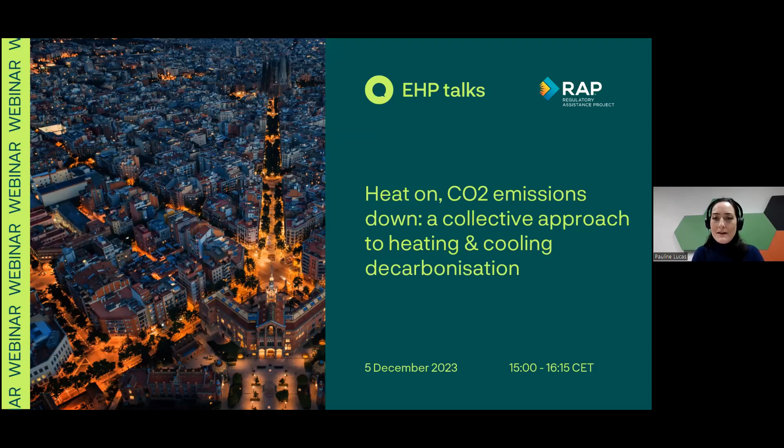For this, I am joined by two other speakers today, Sam and Madis. Sam Oxenor is associate at RAP, the Regulatory Assistance Project, and Madis Laaniste is joining us from the European Commission, DG ENER. We will have three presentations. First, Madis will tell us more about the measures in the Fit for 55 package and how the Commission is going to work on implementation of these measures together with the Member States. Then Sam and I will cover key findings and recommendations from three recently presented documents, covering policy principles and recommendations that can significantly accelerate the trajectory towards decarbonization of heating and cooling.

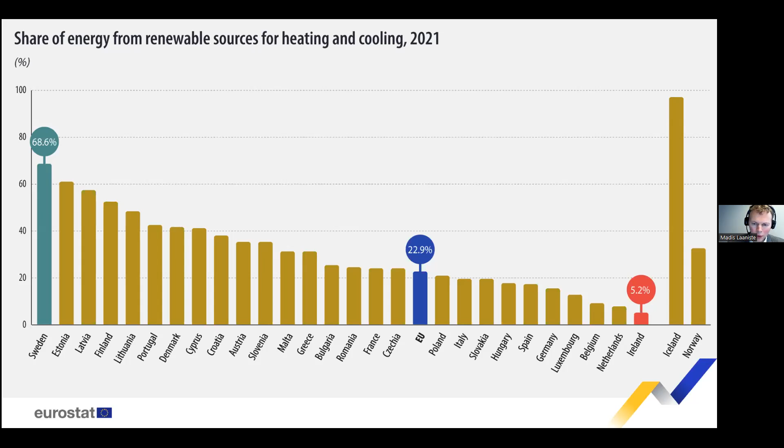With today's presentation, I'm trying to summarize what's been agreed within the Fit for 55 package, and particularly the Energy Efficiency Directive. First of all, what's the biggest achievement, in my opinion, is the new definition of efficient district heating and cooling, putting in place a clear pathway towards 2050.

There are also other important provisions, like putting additional requirements for district heating systems where new units are added or substantially refurbished. In addition, there will be a requirement for planning in all district heating systems to convert into efficient district heating and cooling systems.

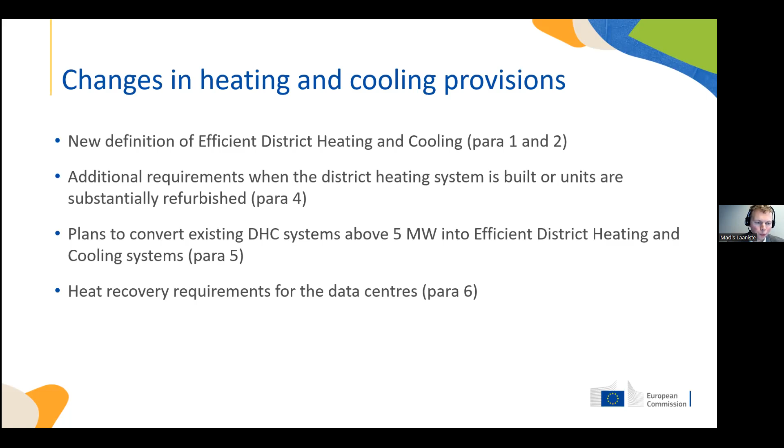A new element is more focused on data centers, and this is complemented with other provisions on cost-benefit analysis, where we are looking at a broader set of installations within the cost-benefit analysis, instead of focusing only on power stations and boiler houses. We are going to search for opportunities to use heat from service facilities, and use waste heat from data centers. So there will be more broad assessments made on this segment, looking at what might provide waste heat to the district heating networks and be a source for more efficient energy supply in district heating and cooling.

And the provisions in the Energy Efficiency Directive are complemented with provisions in the Renewable Energy Directive, and these will bring in the obligation to provide third party access in some cases. Also, there are requirements on the integration of planning for district heating and other energy networks.

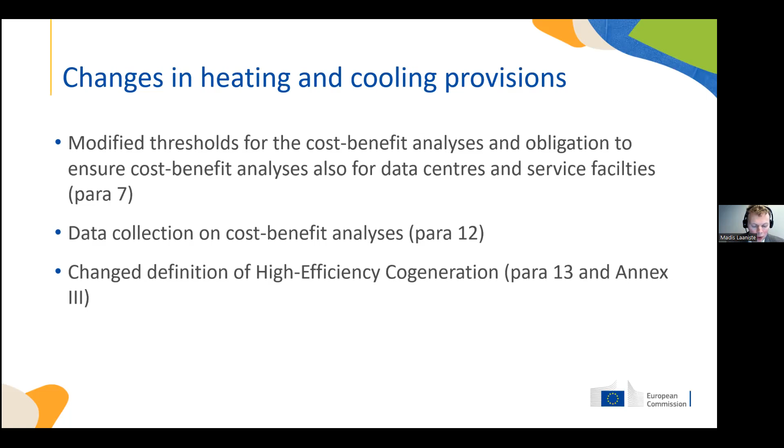So regarding details in the Energy Efficiency Directive, what has been recently agreed about the potential change in the district heating and cooling? With the new directive, we are going to change the definition of efficient district heating and cooling, and there are a lot of numbers and different shares that have been put in place in the directive. But the most important consequence of these new provisions is that as of 2028, only high efficiency cogeneration can be counted when we are trying to achieve the level of efficient district heating and cooling. So at the moment, all cogeneration plants can be contributors to efficient district heating and cooling systems, but later on, only high efficiency cogeneration plants will be able to do that.

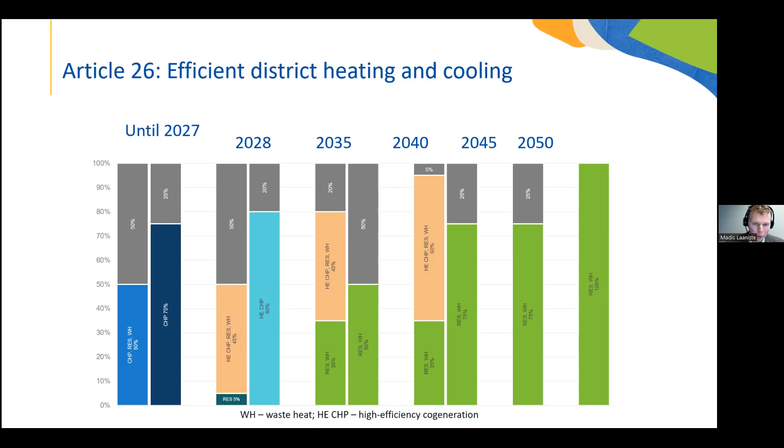In 2035, there will be a big change in terms of sources of energy in the efficient district heating and cooling systems. As of 2035, no systems will be qualified as efficient district heating systems if they purely rely on fossil fuels, and high efficiency cogeneration from fossil fuels doesn't help you achieve that standard. Later on, in 2045, cogeneration is not counted anymore, and in 2050, all system supply should come from renewables or waste heat. So these are four important messages from the definition of efficient district heating and cooling.

With the directive, we have also introduced a second option for showing compliance with the definition of efficient district heating and cooling: through the specific carbon emissions threshold. As you can see, there is a stepwise approach to decrease the maximum limit from district heating until 2050, so the limit will be gradually lowered through the next decades. Member states may use this option to define or qualify their district heating systems.

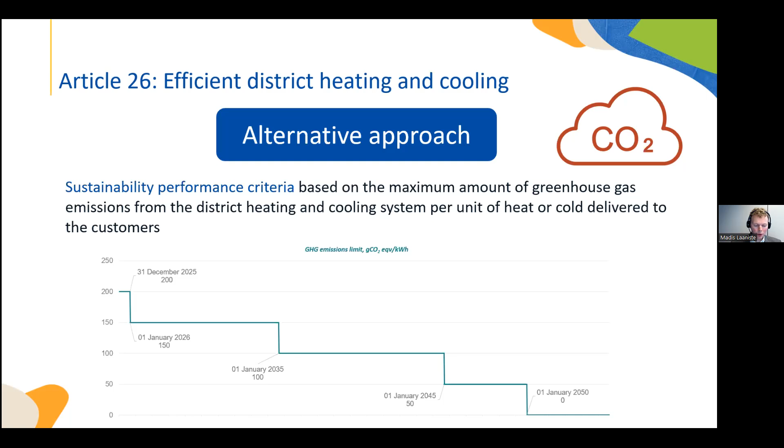Both ways of defining district heating and cooling might be used simultaneously. So member states might have systems that are fulfilling the carbon emissions limit, or meeting the definition that is mostly based on the renewable energy share.

What's also important in the directive regarding district heating and cooling systems is that there will be a new requirement to do heating and cooling conversion plans, and with these plans, every 5 years there should be an assessment of how to convert existing systems into efficient district heating and cooling systems. So what are the key elements of these plans? It's to find ways to improve energy performance in the systems, how to reduce distribution losses, and finally, how to increase the share of renewable energy in heating and cooling.

There is a requirement for these plans to be approved by the competent authority in the member state. So there is a big change for the large number of district heating systems across Europe regarding the legal obligations for those systems.

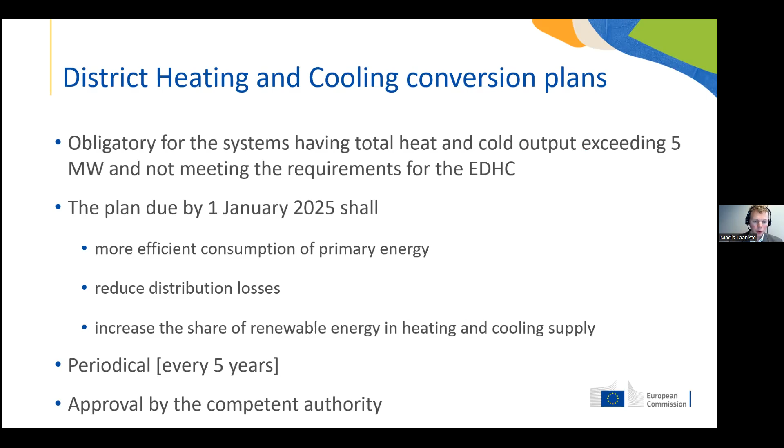What's also important is to remind that, in addition to specific requirements for district heating and cooling, we have general obligations applying to the whole heating and cooling market. There is still a requirement for member states to present comprehensive assessments on the heating and cooling sector, identifying the most resource and cost-efficient solutions for heating and cooling needs.

In addition to that, there is a new requirement that all large municipalities with a population over 45,000 should prepare local heating and cooling plans. These are particularly relevant for areas where district heating systems are in place or planned, and we see a good chance for collaboration between private and public authorities to set clear pathways towards future decarbonization of heating and cooling supply in those locations.

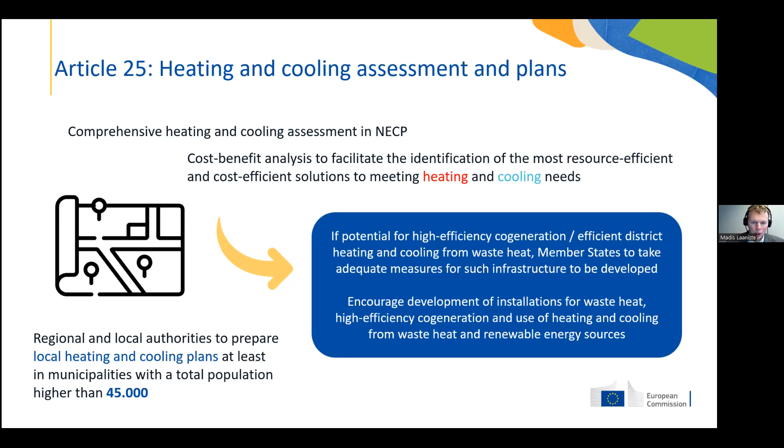So that was my quick summary of the situation in the heating and cooling sector after adoption of the Fit for 55 package, and what are the new obligations in the way ahead of us. Thank you for your attention.

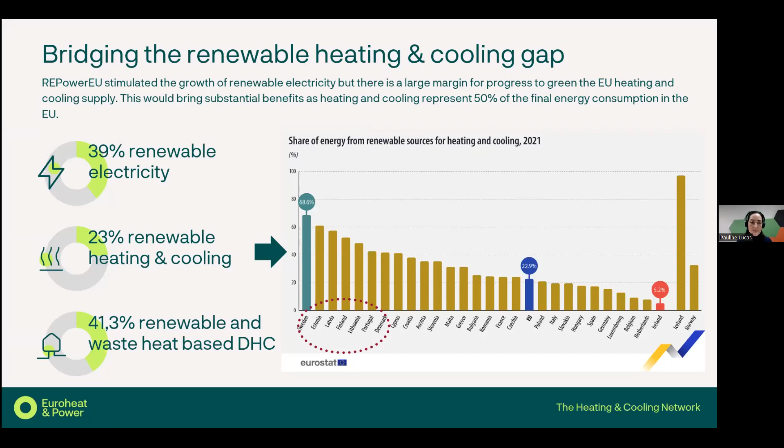First, a change in the production mix, so we will substitute some fossil fuels with renewable production. Second, it will also rely on an expansion of the market, so from the current 13% to 20% by 2030. And then the third reduction will go via the use of biomethane in district heating.

So maybe just as a clarification, this data has been modeled by Aalborg University and is from the study that we showed at the beginning, called Heat Matters, the missing link in RePowerEU.

Obviously district heating won't be the only way to reduce natural gas demand. There will be others also shown on this graph: energy efficiency in buildings, households equipped with heat pumps, renewable deployment, etc. This scenario is actually modeled to achieve 15% more savings than what is foreseen with Fit for 55 and RePowerEU, just by also modeling this type of synergy between sectors and the flexibility that can also be provided by district heating.

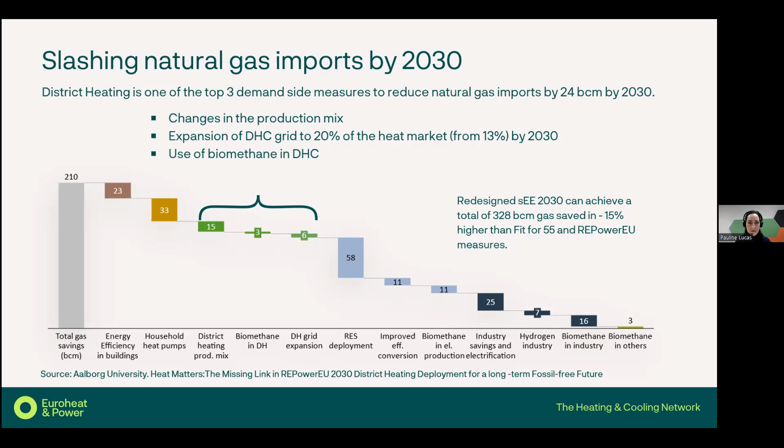If we look a little more into this changed mix - sorry, it's a little small - the key takeaways here are the significant increase of the use of geothermal and waste heat, so 29% for these two combined in 2030 and 49% in 2050. And as I just mentioned, district heating will also have an integrating role for fluctuating renewable energy, both by the use of thermal storage and flexible operation of CHP.

So here you see it's modeled on the left graph, to be used in the winter, and also, of course, with the use of this renewable electricity in large-scale heat pumps.

Of course, this change in mix needs to be combined with more efficient and smarter buildings, so renovation will be necessary. Both this combination of district heating and efficient buildings will enable several things.

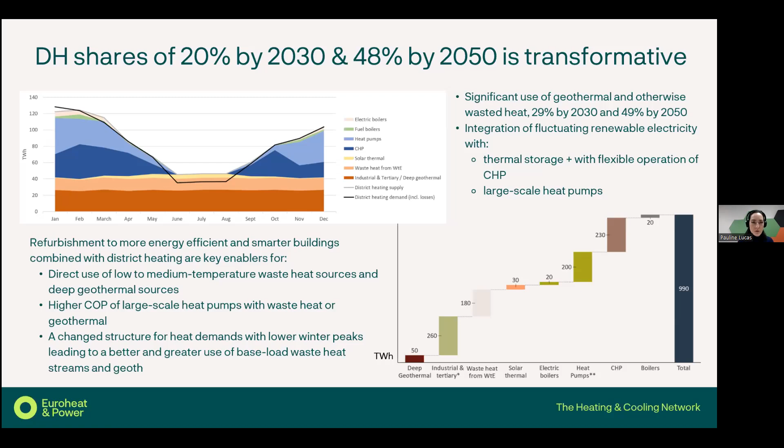The direct use of low to medium temperature waste heat sources and renewable sources such as deep geothermal, higher COP of large-scale heat pumps combined with waste heat or geothermal, and also shaving the winter peaks, changing the structure of heat demand. This is also what is represented here.

Continuing, but you may ask, where is this potential? The study also provides some insight into where the potential is, on which markets.

District heating will increase. Here we have countries that have very low shares now, below 6%, and also countries that already have average shares of between 10 and 20%. The study is anticipating growth in the district heating sector, between 10 to 15% by 2030 and 35 to 55% market share in the heat sector by 2050.

Also, countries where district heating is well developed still have some margin to grow, to cover the rest of fossil fuel installations and easily connect these additional customers.

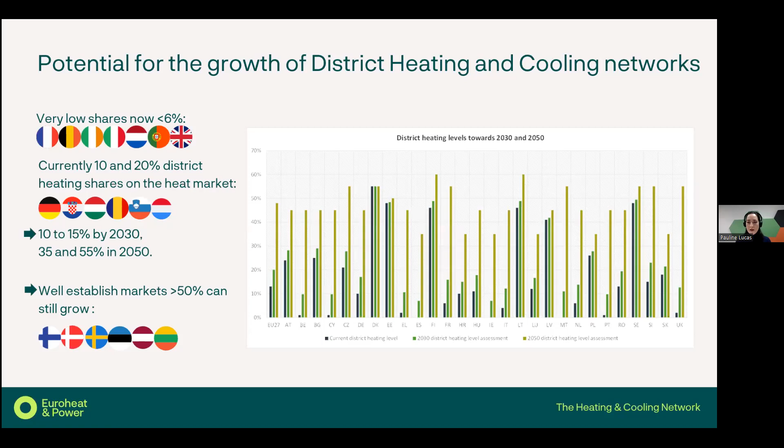We have seen a different representation here, and I will come in a moment to the recommendations. We know we have a strong legislative framework that will lead us to carbon neutrality in 2050, so I will not go over this again - Madis did that for us - but just to say that there are really some safeguards and milestones that will push the sector forward.

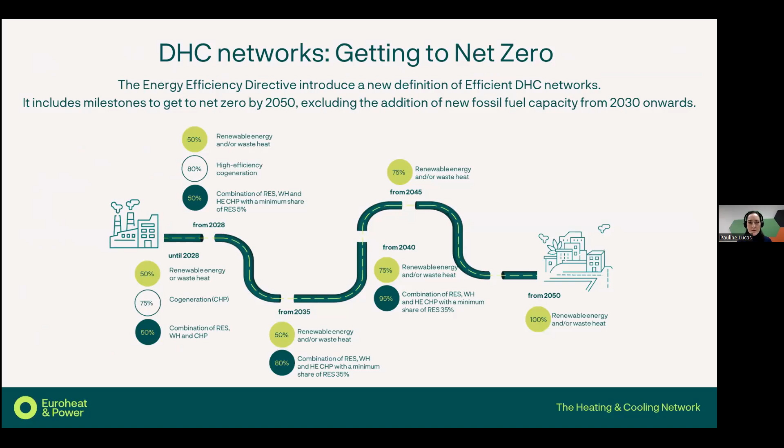But if we want a decarbonized district heating sector, we need these four pillars that we have identified. First, to make buildings DHC ready, or clean heat ready, let's say.

This will go through, for instance, the lowering of the flow temperature - Sam will tell us more about that - or the refurbishment, including hot water loops.

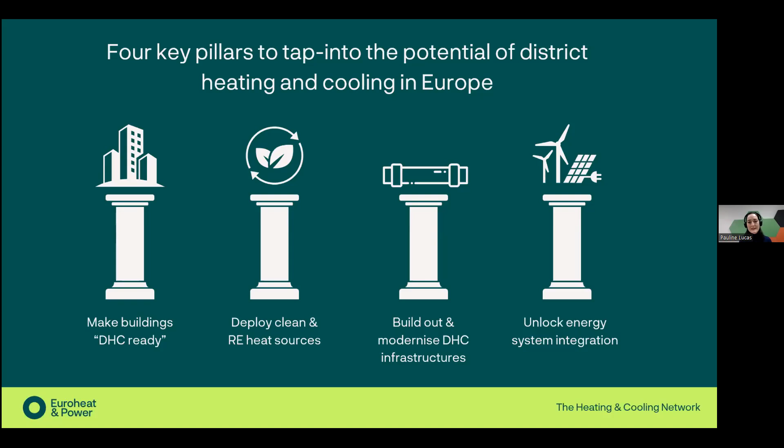Of course, as we already discussed, we need to deploy clean and renewable heat sources. We need to build out, expand, and also refurbish existing infrastructure. Last but not least, the component of flexibility - so unlocking energy system integration will be key.

So now I will go on to recommendations that are not from the Aalborg study, but actually from the blueprint launched by Euroheat and Power a couple of weeks ago. One of the key aspects, I will start with that, is this district approach to building renovation and also energy performance assessment.

Whenever we are renovating one or several buildings, we need to really consider this district approach and make an assessment at district level, considering what type of clean heat sources are available, be it waste heat or others. This goes hand in hand with the planning of heating and cooling.

As Madis mentioned, we now have an obligation for cities above 45,000 inhabitants to plan. These plans are not compulsory to implement.

So what we are suggesting instead is a zonal approach to clean heat subsidies. Wherever it has been identified that district heating was the best solution, support should be provided to connect to district heating. Wherever heat pumps have been identified as the best solution, subsidies for heat pumps should be provided - a very clear approach that enables the consumer to really make the right choice.

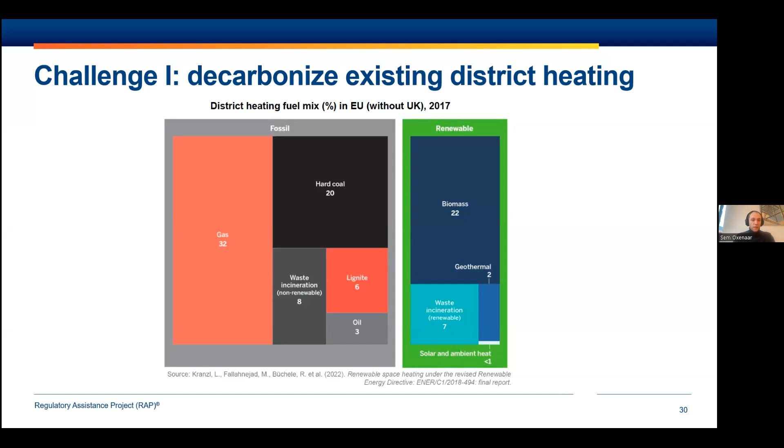Alright, let's get started. As Pauline has already extensively shown in her presentation, there's a huge potential for district heating to provide clean heat. However, there are two main challenges: decarbonizing existing district heating systems, where we still have around 70% fossil fuels in the mix, including a significant share of very polluting coal and lignite that we'll need to get rid of; and expanding and developing new district heating systems that are clean from the get-go.

Beyond decarbonization, there are also many systems in Europe that face challenges on modernization and energy efficiency, and related to that also their economic viability. So this is really the double challenge we need to tackle if we want to make the potentials we see in the field become reality.

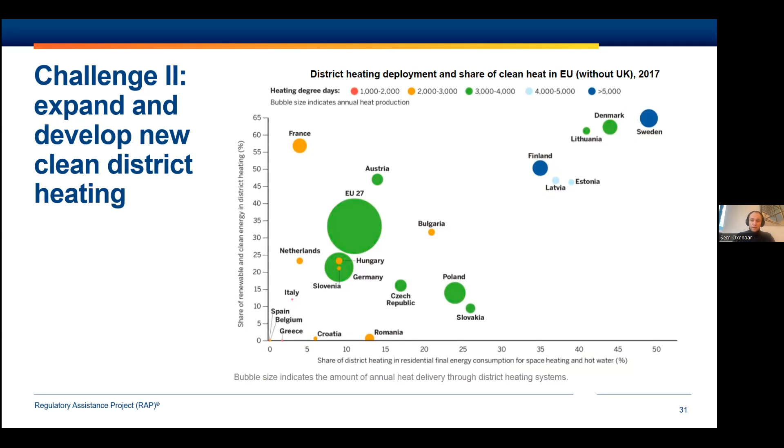We think it is very important that we do this and that we expand district heating, as it can provide enormous benefits to the wider energy system.

On the one hand, it's unlocking this potential of ambient, waste, and geothermal heat sources, but it also has additional benefits beyond that, like increasing energy efficiency due to benefits of scale, meaning you need lower total capacity if you aggregate the heat loads. Instead of giving everyone their own building-level heat pump, doing one large heat pump lets you use lower total capacity, saving on investment costs.

By putting all these heat loads together, it becomes more predictable, meaning operations can be done more efficiently. Additionally, very importantly, something also mentioned by Pauline is the flexibility in supply and demand of heat, connected to storage. This is something we will need a lot of in a fully renewable system.

For example, the International Renewable Energy Agency estimates that thermal storage right now is around 234 gigawatt hours. If we look at a super ambitious renewable energy scenario for 2040, the EU alone would need 800 gigawatt hours of thermal storage. That's a mind-boggling increase in thermal storage that we need.

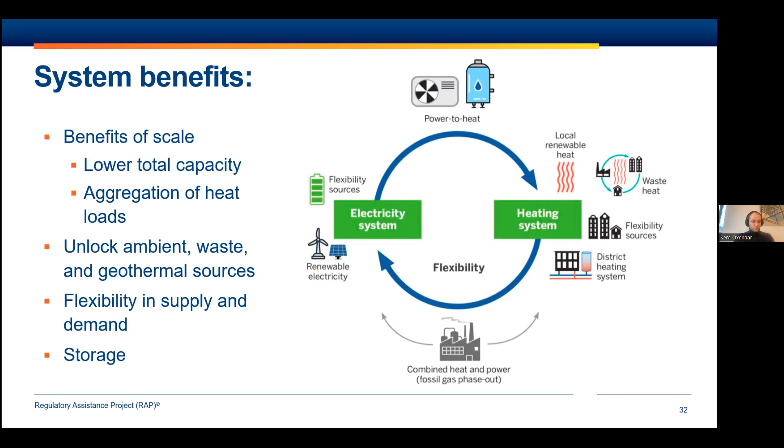But to take up this key role, while at the same time keeping heat affordable, we need to make sure district heating and cooling does not only become clean, but also efficient and smart, especially to make sure our investments are put in the right place and we keep things cost effective.

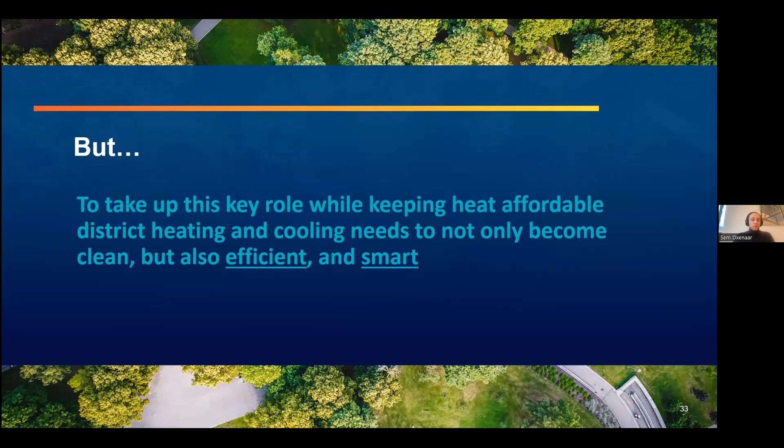To achieve this, we need to make sure policy promotes the right things. This is what we hope to do with our set of policy principles, to give direction on where to go with district heating and regulating district heating.

In our view, it's really important to put efficiency first, whether it's in production, distribution, and consumption of heat, because it reduces the size of the decarbonization challenge we have, and at the same time lowers costs, meaning we keep heat affordable.

Then we really need to use local heat planning, enhance alignment between developments in heat supply, but also on the other hand, distribution and demand, including where relevant, the phase out of gas grids.

Third, we see big value in available and unavoidable waste heat. We've seen the potentials in the study by Aalborg that Pauline presented. There is a huge potential, but we need to find ways to make use of that and get it to the heat users.

We need to ensure end user protection while enabling viable business models. We need to shield users from potential monopolistic behavior by district heating operators, but at the same time balance it with finding business models that ensure there's interest in investing in expanding district heating.

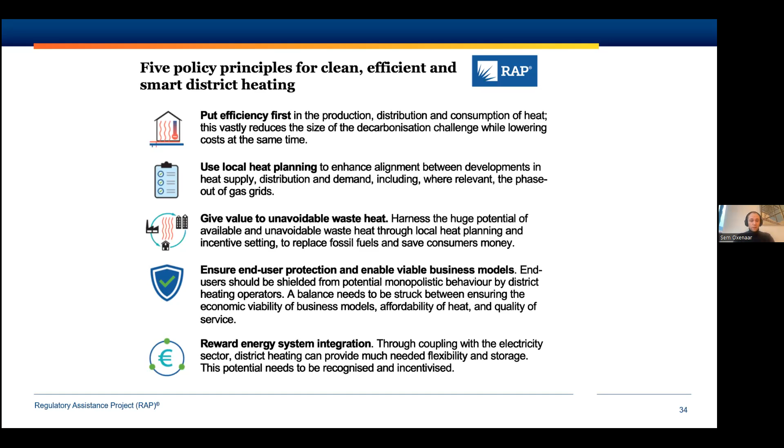Given the limited time I have, I will briefly walk through some of the principles in more detail, and then end with some insights on policy.

Putting efficiency first is crucial. It reduces our total investment costs, and makes sure we can actually meet demand with locally available renewable heat.

So I think for many of the people in the audience coming from the more technical side, they will be very familiar with all of these potential issues and solutions there are. But in a nutshell, it's basically we need to reduce distribution losses, optimize production, and reduce heat demand and temperature needs in buildings. Lowering flow temperatures is a key solution to that. It brings a whole host of benefits in one go, and also enables much better use of renewable heat sources. Increasing digitization and automation is a big support in this, and of course adding thermal storage.

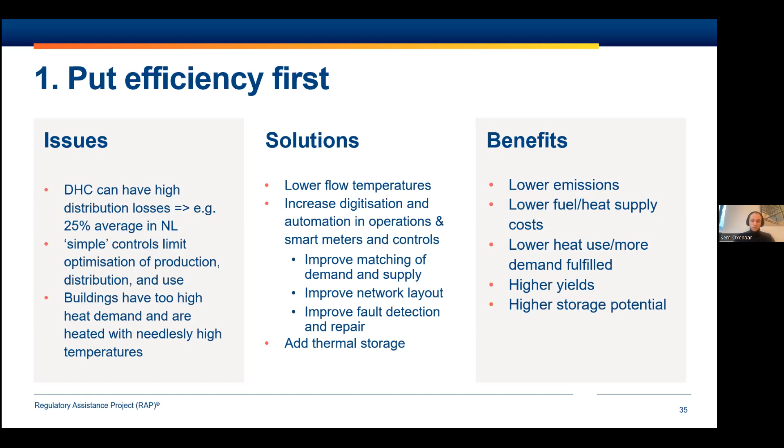Just to give an example, this is from a small district heating system, and they were in the process of expanding and also lowering their flow temperature. They were actually already at a relatively low temperature of 65 degrees Celsius, and they're lowering it to around 55. You see that they got a huge benefit, especially in reducing their heat losses by 30%, and also really reducing the amount of electricity their heat pumps need by 37%, and also even increasing the yield from their solar thermal panels and their storage. So there's a manifold of benefits coming from being able to lower these flow temperatures.

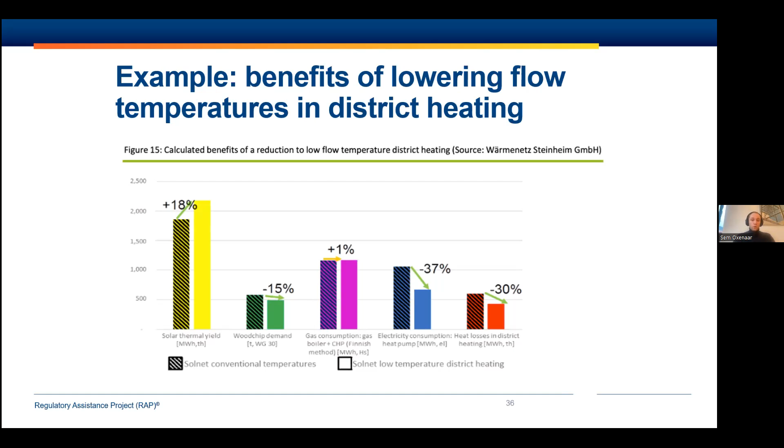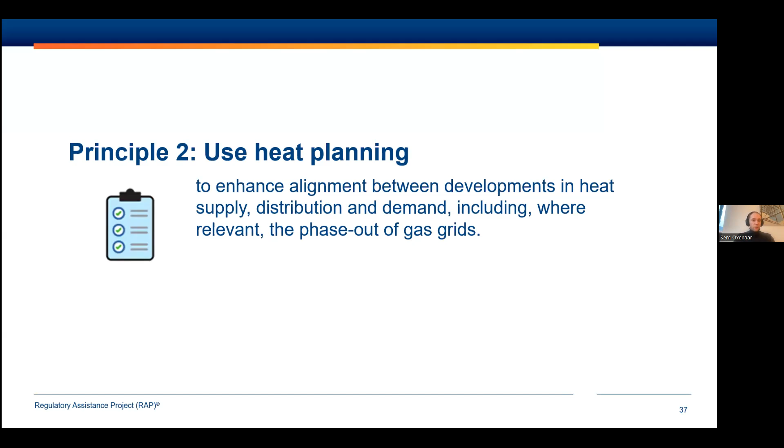So then the second principle, we need to use heat planning. Pauline already touched on this one, so I won't dwell on this too long. Maybe one thing I do have to add is it really requires a national level support system. We have heat planning for towns, but it's really not enough to have them do it. It needs to be done well and needs to be based on the right principles. Especially smaller municipalities will not have the capacity and resources and knowledge to do this. So we need national level support systems for this.

Also driving standardization, making sure not every municipality needs to reinvent the wheel and come up with their own way of doing heat planning, but can learn from the bigger cities, the front-runner cities, and then also have a good system of monitoring in place. And this also involves new legal powers for local authorities. For example, if you want to implement something like zoning, then at the moment in many countries, municipalities do not have the authority to do this. So new legal powers are necessary for municipalities. And finally, we will need to build a lot of capacity among city planners to make this work and also make the heat planning effective in achieving our goals.

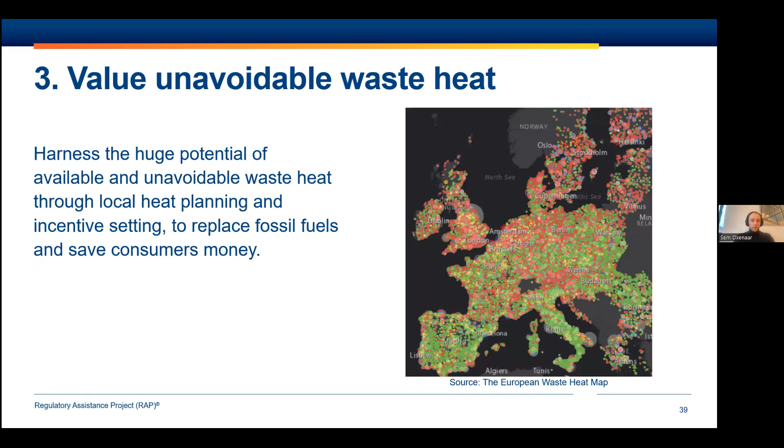Then valuing unavoidable waste heat, a super important element. And I wanted to highlight here just a small example. So in theory, we have high amounts of waste heat available, and it's really a waste if we're not using it. It doesn't mean that every waste heat is made equal. So even in theory, there can be high amounts of waste heat available, but in practice, there can be quite a few barriers to using it.

For example, looking at Antwerp and Ghent, two cities in Belgium, both have nearby port areas with industrial areas, and a lot of waste heat available in theory. But then once they started doing their heat planning and really talking to all the waste heat providers in their town, they found out that in the case of Antwerp, it was really doable to build a district heating system based on the waste heat because it was at the right temperatures, the right amounts, not too far from the city, so limited transport. Also, they found that they had a lot of building types well suited for this - high apartment buildings, meaning not too many connections. And they had a really good trajectory where they could put in the pipeline. This made it feasible for them to really run a district heating system on waste heat.

But then Ghent, which is not too far away, has a very different makeup as a city. It has much lower apartment buildings, meaning many more connections would be necessary, making it much more expensive. Also, the waste heat was much further away from the city center. And also a lot of the waste heat was no longer available after the energy crisis, because a lot of the industry really took a good look at their processes and realized they could reduce their waste heat production, reuse it themselves, and started sharing it with other industrial neighbors. So a use was found for it, but it wasn't available to put in a district heating system for the households. So I think this is a super important element - yes, we need to use a lot of waste heat, but we also need to be careful about where and how to make this possible.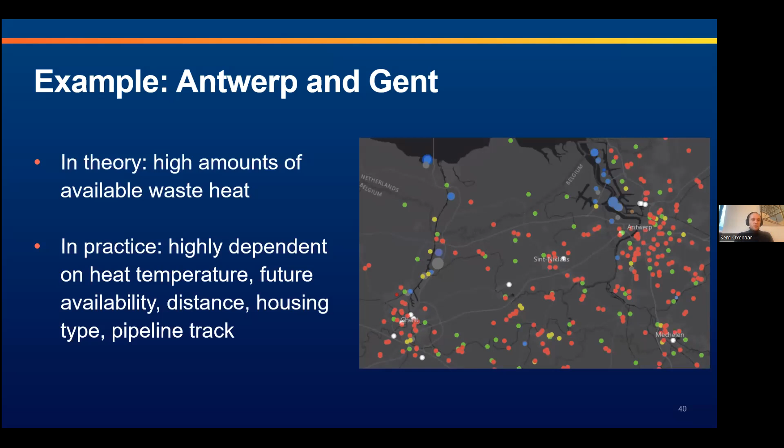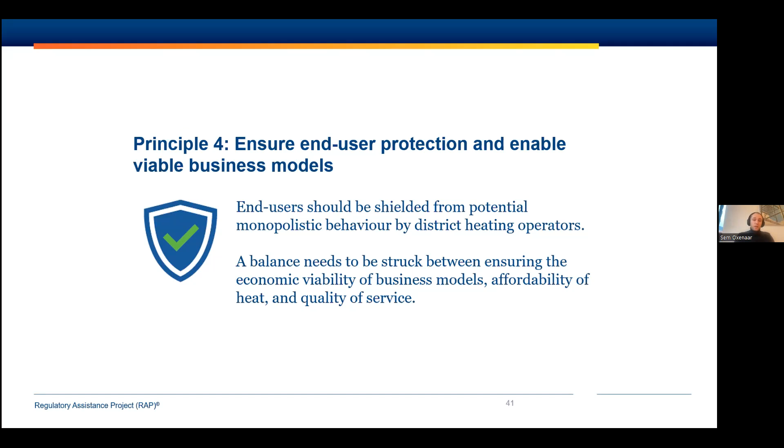Then the fourth principle, which I think is really key in making district heating work and is especially relevant in those countries that have had less of a history with using district heat and as such have underdeveloped regulatory frameworks for it, is to ensure end user protection and find a system where people trust district heating as a clean heat solution, and where district heating can compete on price and service levels with other clean heat solutions, especially in the future with direct electrification through heat pumps.

There are many ways that countries are regulating district heating to try to achieve this, whether through price controls, ownership and operation controls, or the way grid use and access is organized. I don't think there's one best way of doing it, but over the coming years I think we'll see a lot of developments here. We're already seeing this in the Netherlands, France, and Germany, with a lot of updates underway in how district heating is regulated and how consumers are protected. This is a key part of the puzzle we need to get right if we are to achieve high shares of district heating in those countries.

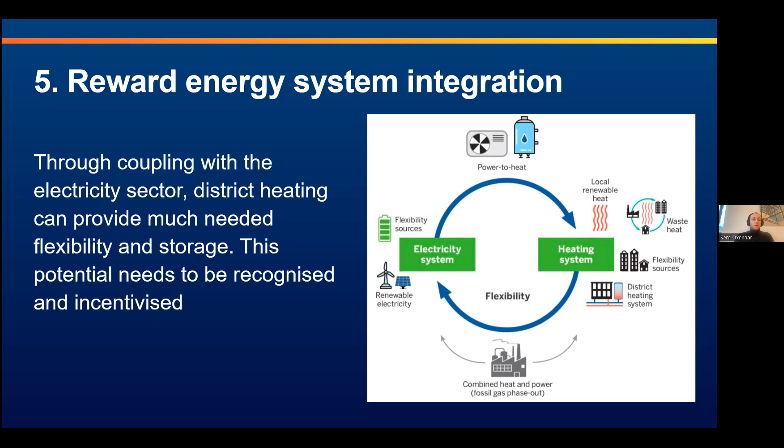This is something we should really stimulate, and there are many ways of doing that. It can be direct subsidies for installation of heat pumps and e-boilers, but it's also really important to make sure we get tariffs that incentivize flexibility and sector coupling.

So, looking at the time, the final thing I want to say is that we have a lot of different parts of the puzzle that need to come together. We really need to coordinate policies to make district heating clean, and clean in a way that lets it serve a wider role for the energy system. This means looking at heat planning, but also energy taxation and grid tariffs, as Pauline mentioned, and also the building side: what building standards and codes do we have, how do we make sure buildings are ready for lower temperature heat in time, emissions and efficiency standards, and district heating regulation itself—protecting consumers while enabling viable business models.

Last but not least, I think it's also a key element for public acceptance and trust in the sector to make sure we get energy communities in heating to function correctly, because there's huge potential for smaller district heating systems at the neighborhood scale, and energy communities can play an important role in this.

So to round it off—let's see if I can go to my final slide. District heating needs to become clean, efficient, and smart, so it can really take up its role as a provider of key storage and flexibility. We really need a coordinated policy approach across heat, buildings, and gas grids to make this happen. I think this is really the challenge we need to face in the coming years.

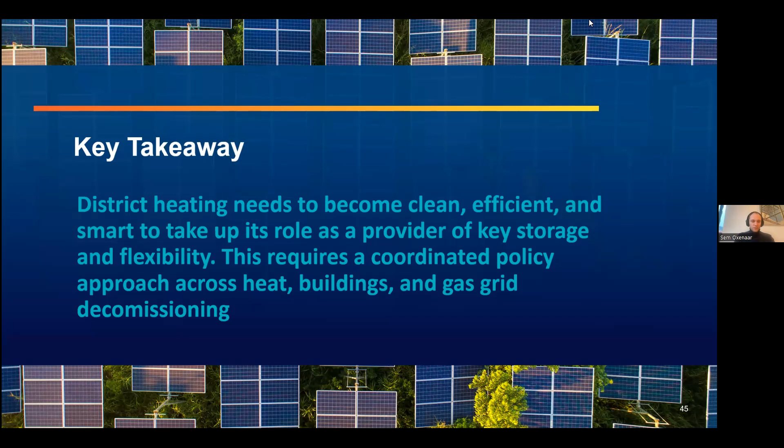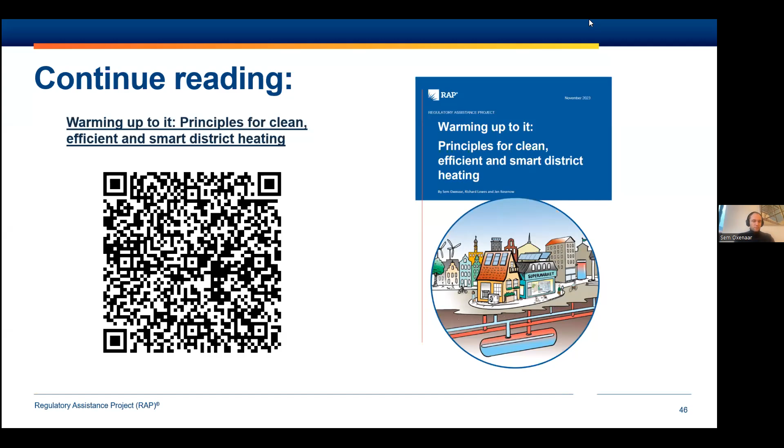Thanks a lot, Sam, for this comprehensive presentation. I see a lot of alignment between the Aalborg study, the blueprint developed by Euroheat & Power, and the RAP study as well, so this is really good. This is the way forward.